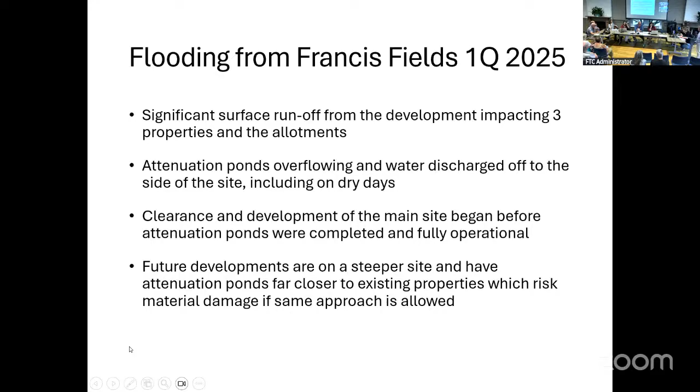Future developments in the area are on a steeper site and have attenuation ponds far closer to the existing properties, which will risk material damage if the same approach is allowed. Could we move on to the next slide?

So on January the 26th there was some heavy rainfall. There's a map on the left which shows the 2 attenuation ponds outlined in blue - pond 1 was already dug, pond 2 was in construction. The purple lines show the way the water was flowing downhill. 3 properties were impacted: Selwood, just above Birchill Lane, and then My Way and Birchill Cottage, to the south of Birchill Lane. They were all impacted by flow coming from the southwest corner of the site, and the residents at Selwood were aware of pumping.

On the other side of the site, in the top corner, you can see where the allotments are labelled. They were impacted by flow coming down from the east side of the site, shown by the dashed line. Attenuation Pond 1 was overflowing into Field C, flooding onto Birchill Lane and down into Field D. All of these routes end up with water going into the river Frome with additional sediment. The rainfall was typical for the time of year in January - in fact we'd had a similar amount of rain the first week in January, and there had been no issues along Birchill Lane. Thank you.

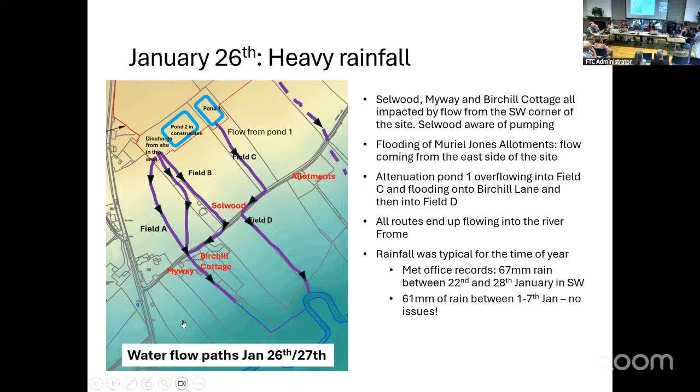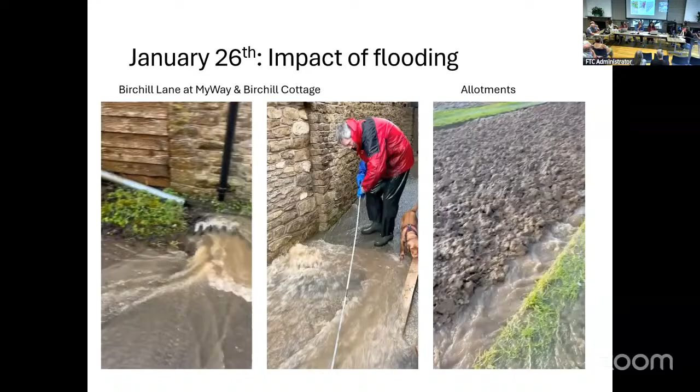If you can move on to the next slide please - so we've got 3 videos here. The first is a clip of the water coming off Birchill Lane, off Field A onto Birchill Lane. If we just play that again - you can see there's a large amount of water coming down. It's then hitting a drain and going underneath, and that wall is actually the house wall of My Way. There's a lot of water.

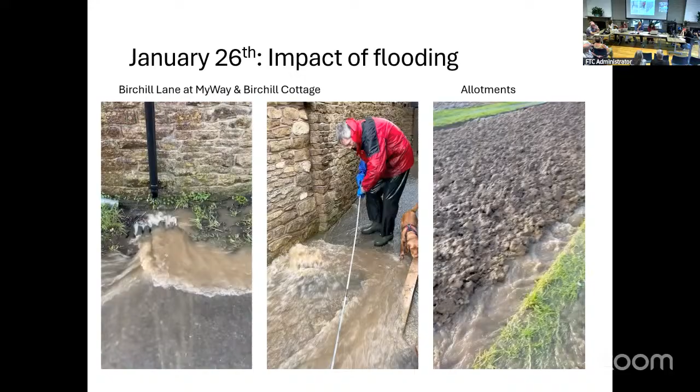If we go on to the next one, that's in the narrow alley between My Way and Birchill Cottage, and we've got water flowing down, backing up through a drain.

It then goes rushing on down through our garden. And the third video is the allotments. There's just water everywhere, flowing downhill, and parts of our garden looked quite like this as well. There's sediment running down and also soil being stripped off.

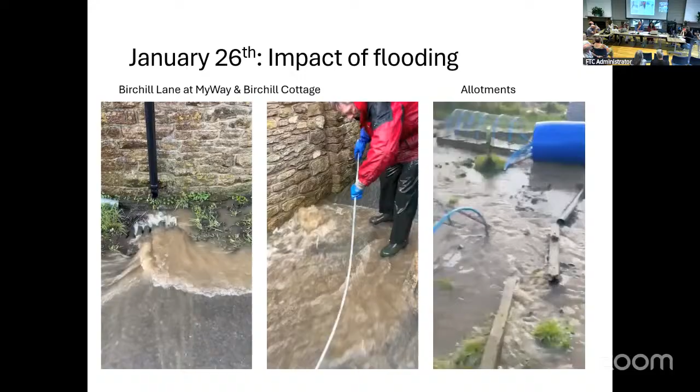So there's a lot of water. If we move on to the next slide, this is now what Pond 1 is looking like. Pond 1 isn't actually quite full, you can see it's maybe somewhere between 50 centimetres and a metre from the top. But the ground below it, in the middle picture, is saturated and flowing onto Birchill Lane.

It goes onto Birchill Lane, runs downhill a little bit till it finds an old culvert, which it overwhelms. If you click the video on that image, you can't hear the sound, but you can see that flow is less than the flow on either side. So there's more water coming off the sides of the development than there is in the middle, below the attenuation pond. Let's move on to the next slide.

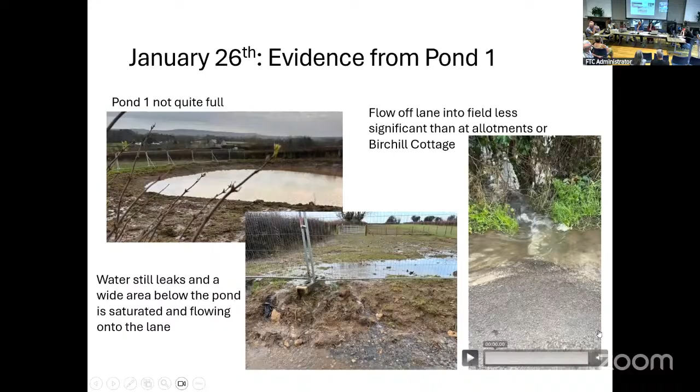Okay, the end of February, we've got some more heavy rain. It's the same map, but I've marked on the flow paths again in purple, and you can see they're all now coming from the middle of the site. There's nothing coming off the sides this time.

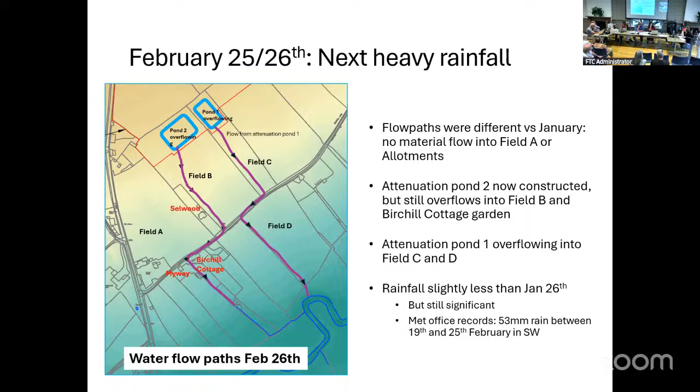Pond 2 is now fully constructed, which is great, but it is overflowing, and that water goes into Field B, along the road, and down into the garden of Birchill Cottage. Attenuation Pond 1 is also overflowing, as before, into Field C and D. There's a bit less rain, but it's still a good 2 inches, so not really that different from January. If we go on to the next slide please.

So you can see in the top left, Pond 1 is overflowing, now absolutely full to the brim. The picture in the middle is looking down from below Birchill Lane in Field D, and you can see that field is running with water all the way to the river. There's a lot of water flowing down there.

That is above the area that was all dug up with the pipe that was put in. So all the water is still ending up in the river, just with more sediment. Pond 2 at the top is constructed now, and it's completely overflowing, going into Field B, which then runs on down onto Birchill Lane.

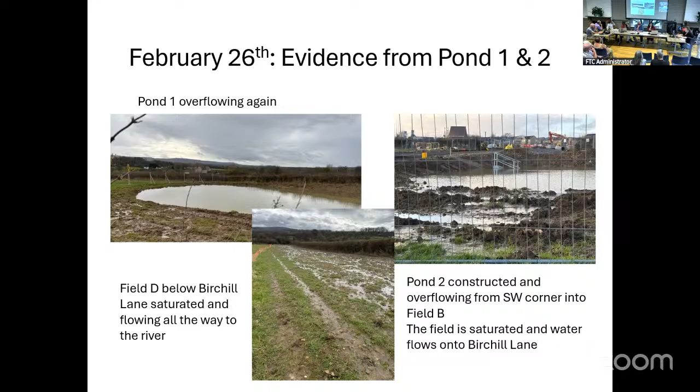Okay, next slide please. So that's March 4th, a dry, sunny day. I go out at 10 o'clock and the road is dry. I come back at 12:30 and it's wet. I follow the water uphill and come to a pump, actively pumping to the side of the second attenuation pond, and that water is discharging off into Field B, which is squelching with water.

That water is flowing into the top of the garden at Selwood again, and also going down onto Birchill Lane. The last picture on the right is what it looks like 300 metres away from the pump, in the garden at Birchill Cottage. So it's flowing for more than 300 metres. There's quite a volume of water that's appeared.

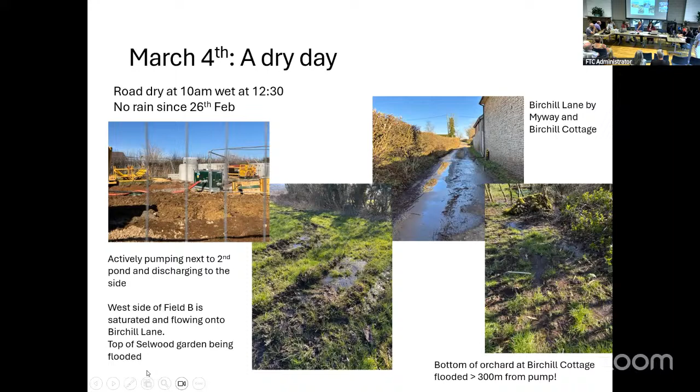Okay, thank you, if you can move on please. So in summary, the flooding was caused by both the overflow of attenuation ponds and discharge that was allowed off to the sides of the site on multiple occasions, resulting in unrestricted flow into the Frome. At the time the attenuation ponds were flooding, they were still being constructed and connected, and the outflow to the river was not operational.

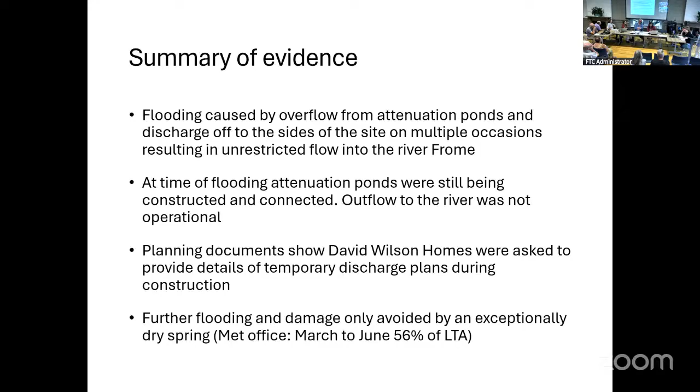The planning documents do show that David Wilson Homes were asked to provide details of temporary discharge plans during construction. I think we've only been saved from further flooding because of the exceptionally dry spring we've had. If we just move on one more to the next slide please.

So that's happened. My concern is what's going to happen going forwards. We've got 2 more developments in the area, both on steeper sites. There's the proposed development of Birchill Lane by David Wilson Homes, and also the next phase of Francis Fields across the B3092. They both have attenuation ponds closer to properties than the Francis Fields one.

In this image here, from the new proposed Birchill Lane development, you can see Birchill Cottage and Myway highlighted in yellow. Right across the road, which is about 4 metres wide, is an attenuation pond. That attenuation pond is within 10 metres of a house wall. The site is steeper than at Francis Fields, and the floor level of those properties is below the pond.

And if you think about it, in that 10 metres, you've got 4 metres of road, 1 metre of hedge, and then about 5 metres of field. And if that pond is allowed to fill, it will become fully saturated, and you've got a drop. It could all end up in the road, and then the houses.

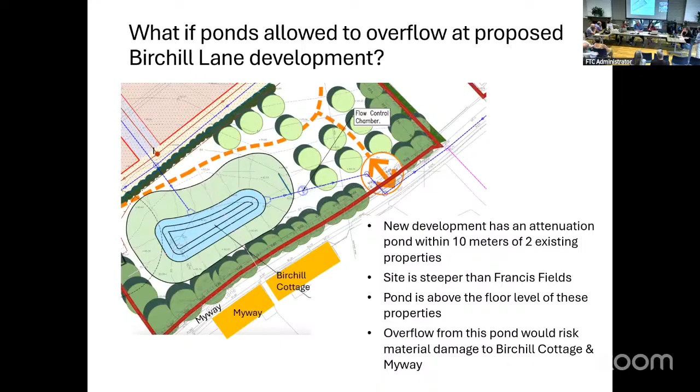So if we just move on to the last slide, just some key takeaways. We can't have the mistakes that happened at Francis Fields being repeated. There is a material risk of damage to existing properties on these steeper sites if, during the development phase,

the site gets cleared before attenuation ponds are fully connected. So we really need to think about the process here. Main site clearance and development shouldn't be allowed until the attenuation pond drainage system is fully functional and also accepted by Wessex Water, so the water has got somewhere to go other than just over land. Thank you.

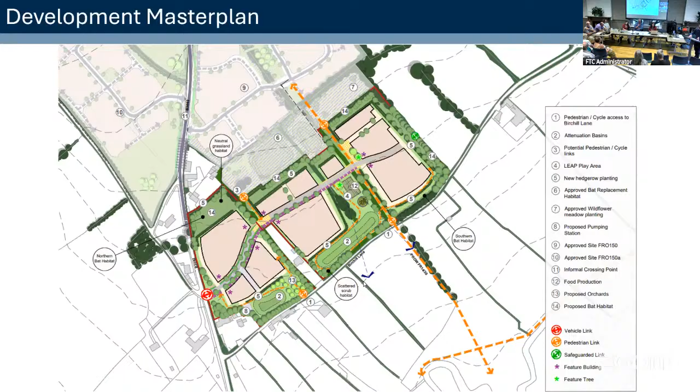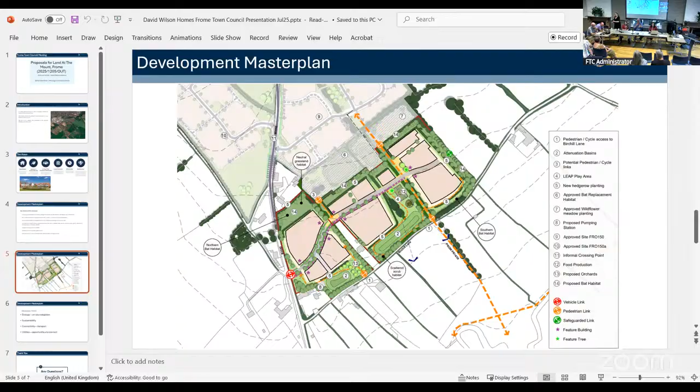Not tonight, but in future we're going to collate everything we know so far, and then we'll probably have another meeting. We'll do it all in the open, not behind closed doors. We want to collate what we've done so far, bring in various other bits and pieces, make sure we know what we want in terms of Section 106, connections to allotment sites, etc., and then we'll have another meeting. Okay?

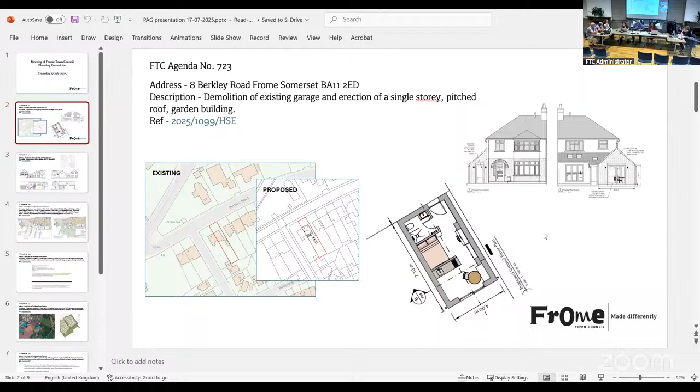The next one on the list for discussion is number 725. This is the Beaches at West End, and it's for the replacement of timber windows with a PVC alternative.

I raised this one because of the PVC windows. I should point out that this is described as sheltered accommodation, and the intention of the work is to maintain the external character of the building while significantly enhancing its thermal efficiency and reducing maintenance requirements, future cost, and improving internal comfort for residents.

I can't remember what the Civic Society said on this one. They have no objection in principle, but because it's in the conservation area, they feel a higher quality material such as powder coated aluminium would be preferred. They feel plastic would not only look out of character, but degrade over time and fail to maintain its original appearance. That was the reason for raising it, to see whether you had any objection to the PVC.

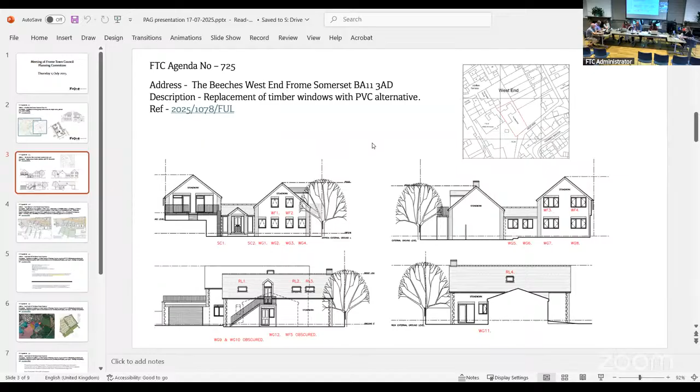The houses have been moved slightly further back within the plots as well. It isn't significant, and I'm sure it will make a difference to the applicants in how the plots are built and brought forward, but it's not going to make a huge visual difference.

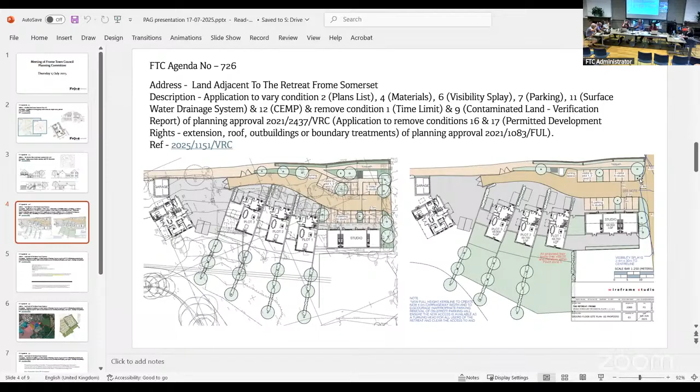Okay, so the next one on the list is where things start to get a little complicated, so maybe we should move this one up. This application, number 731 on our list, is for land south of the Mount, and it's actually one of the David Wilson Homes sites that we were talking about in reference to the drainage not so very long ago. This application is to vary condition 24, which relates to solar panels.

Originally the commitment was that all houses will have solar panels on them, and that each solar panel would generate, sorry it's not on here, that's my fault, I think it was 3.5 kilowatts of energy for each house, yeah.

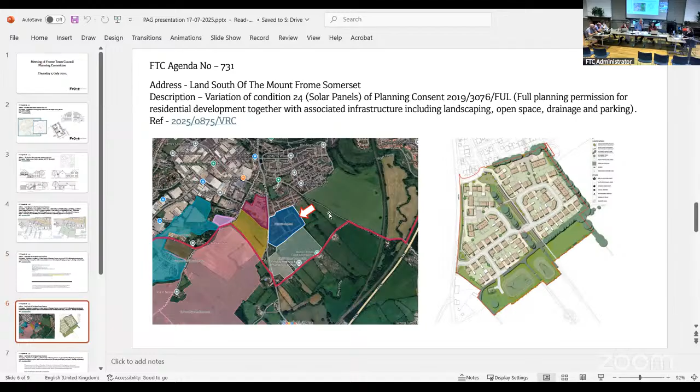So what I've said in the notes is, it's great that all the houses will have solar on, and we really appreciate the sustainability measures, but there is still a slight loss there. So how will that loss be compensated for? Is there any proposal to put an alternative in? That's my question. I don't want to approve it or not object to it until we know the answer, and what additional sustainability measures they're going to do to compensate for that loss of carbon reduction.

It's a shame we couldn't have grabbed him at the time. Did you know the answer? I think you took Helen's idea that the roofs were too small, so that was sort of the answer, as in there wasn't anything they could do, but it would have been really good to ask him what the mitigation was.

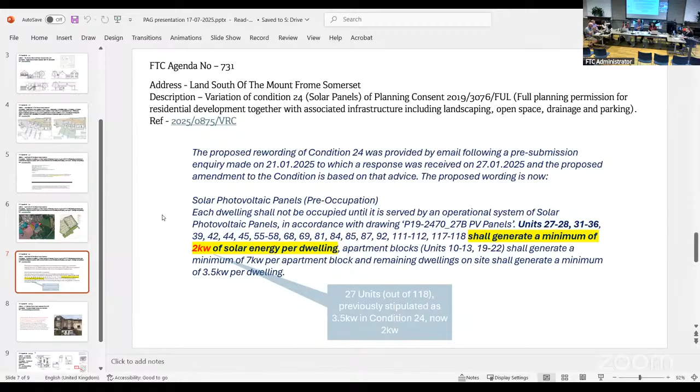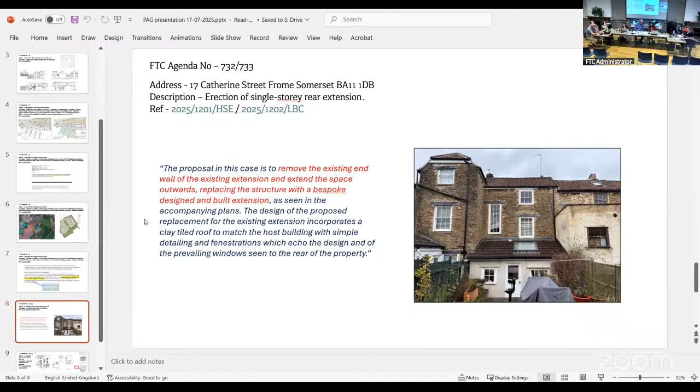And I'm afraid after that I got a little bit confused. The first thing that appears to have happened, and it's very small on the screen but I'm sure you've looked at it, the red line on the site location plan does not match the property they've indicated the extension will be on. It's on the property next door. So that was confusing to start with.

I think there should be clearly existing and clearly proposed plans rather than superimposing the existing with the red line on the plan, because it certainly wasn't clear to me what the proposal was. I must admit I looked at it very carefully because I really couldn't work it out. So I think we need to ask for some clearer drawings.

And the Civic Society said more information needs to be provided. The development will extend beyond both of the neighbouring rear extensions, but there's no information about the side elevation that will be exposed. There's very little context indicated on the drawings, and the building on the left-hand side does not appear to be represented accurately because it doesn't correspond to the photos, which is a much better way of saying what I said.